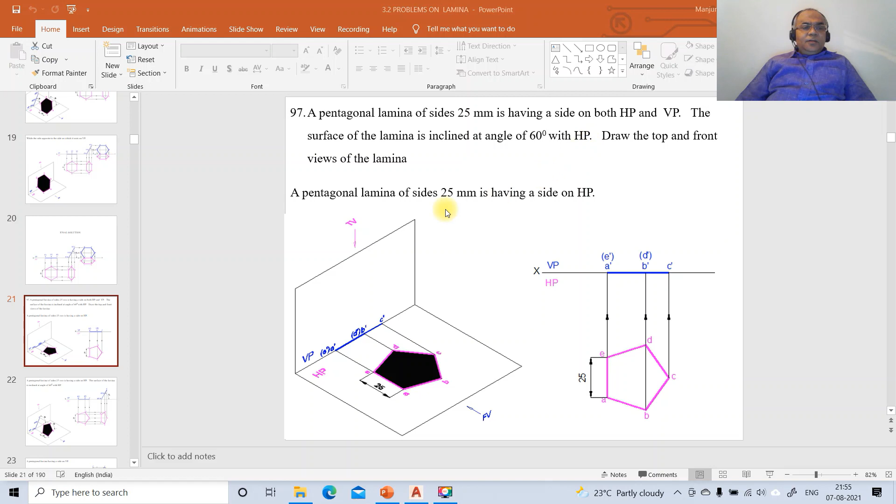A pentagonal lamina of sides 25 mm is having a side on both HP and VP. The surface of the lamina is inclined at an angle of 60 degrees with HP. Draw the top and front views of the lamina.

To do this, first we'll go for this, the actual final solution. So we have to transform this drawing, showing the procedure to do this problem using AutoCAD software.

First we go to the AutoCAD screen, switch off the grid mode and switch on the ortho mode. The command is limits: specify lower left corner, by default 0,0, enter, upper right corner 297,210. This is the sheet size of A4.

Then zoom all. Then go to line, select some arbitrary point on the AutoCAD screen on the lower left corner, click on the first button of the mouse and drag towards the right side for some distance, click again and take the cursor to the top side, take some distance, click again on the first button of the mouse, and press enter key.

Then go to offset, take the distance as 297, select this vertical line and offset to the left side. Again go to offset, take the distance as 210, select this horizontal line and offset to the top side. Then go to zoom extends, then zoom 0.6x.

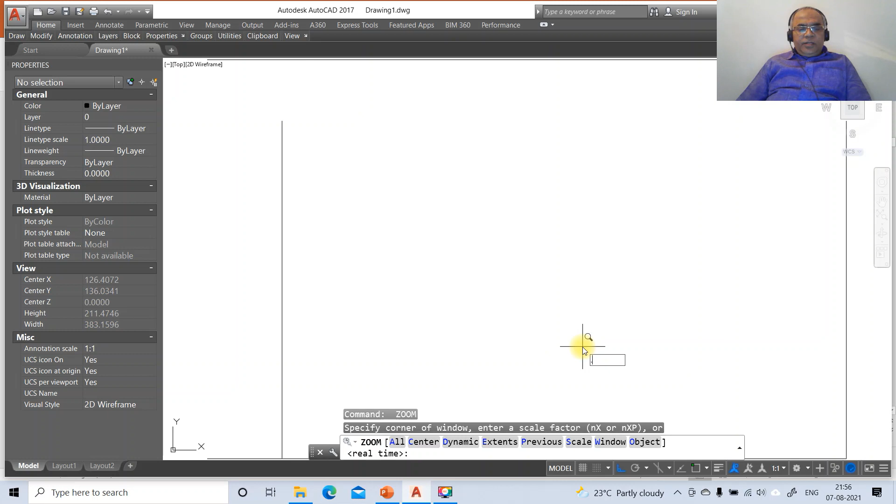Then go to fillet, select this line and this line. Again select between these two and select between these two.

Then we are going to use the layer command. Click on new layer, type the layer name XY, enter. Again click on new, type the layer name front view, enter. Click on new, type the layer name top view. So we're going to get only these 4 layers.

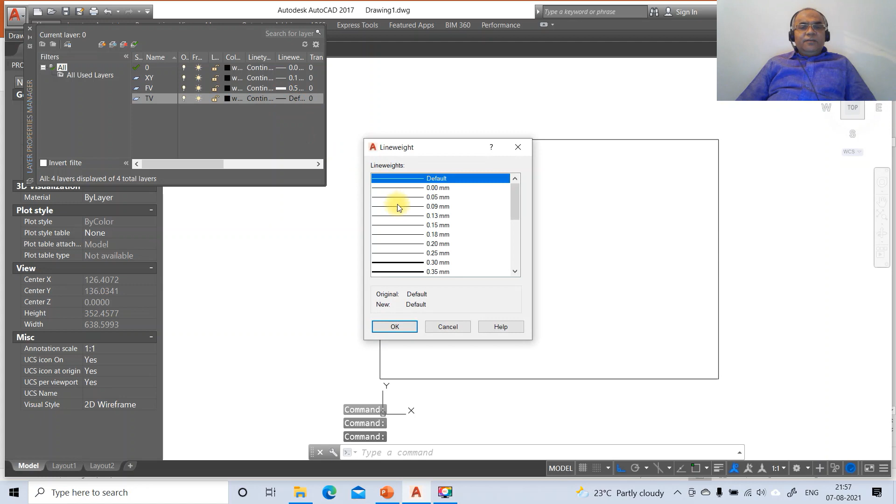Layer 0 will contain the projector lines, and all the projector lines will have line weight 0.05, click OK. The XY line will have line weight 0.13, select that and say OK. The front view will have line weight 0.5, click OK. The top view will also have line weight 0.5, say OK.

Then the top view will be having the magenta color. Just click on that and select magenta color, say OK. And the front view will have the blue color. Click on blue and say OK. Now close the layer command dialog box.

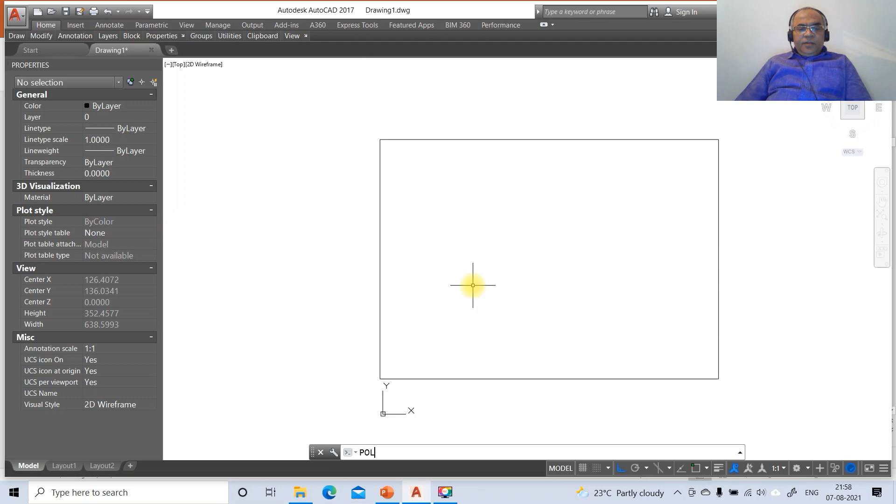Now first we are going to draw the pentagon of 25 mm sides at this position. Go to polygon. By default the number of sides is 4, you just take 5 and select the edge option, select some arbitrary point, click on the first button of the mouse, and drag towards the diagonal side, taking distance as 25.

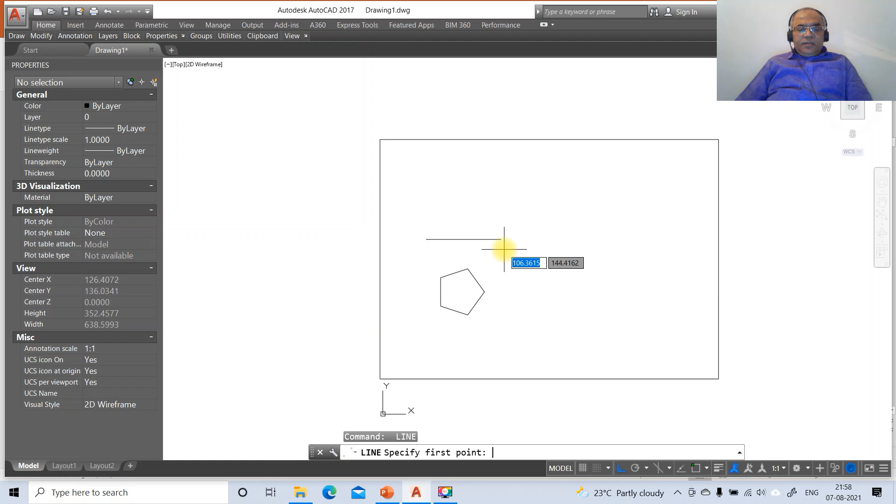Then go to line, draw a horizontal line here of any convenient distance. Then go to line, take the intersection point of this and draw perpendicular to it. Similarly, take the intersection of this and draw perpendicular to it, then go to line, take intersection point of this and draw perpendicular to this.

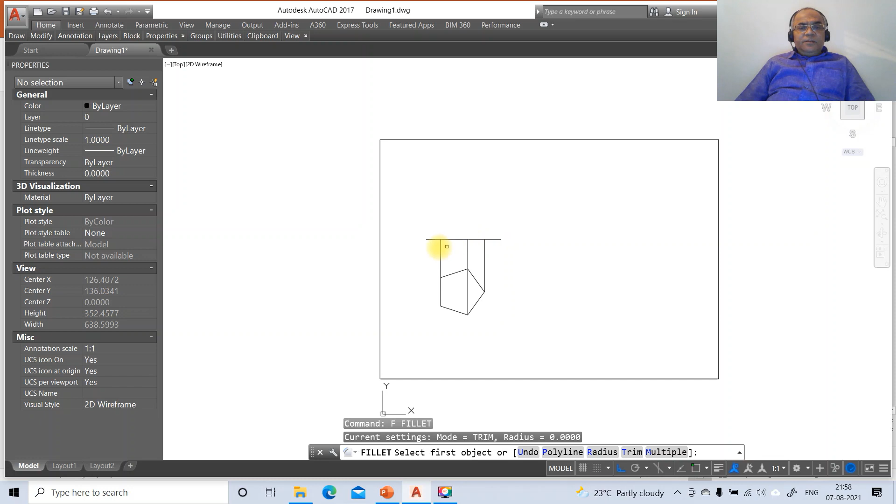Then go to fillet between this line and this line, again between these two lines. Then go to break this line, take the first point as the intersection of this, and say shift at the rate, then enter.

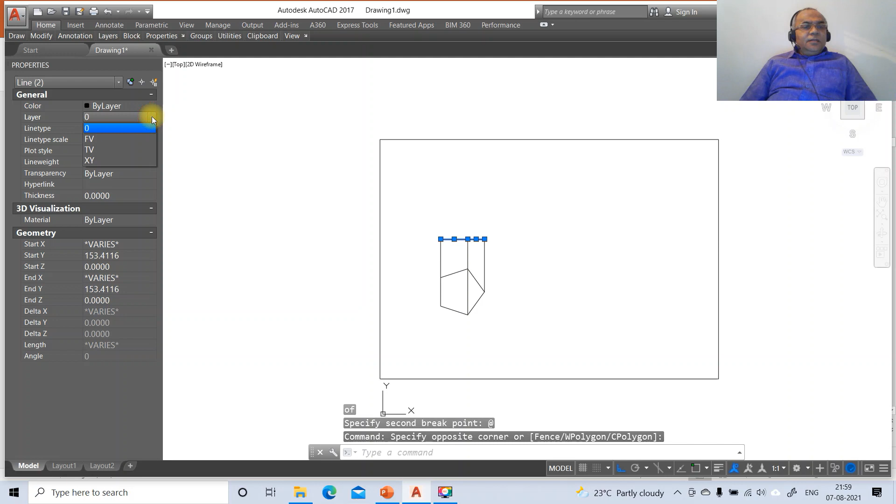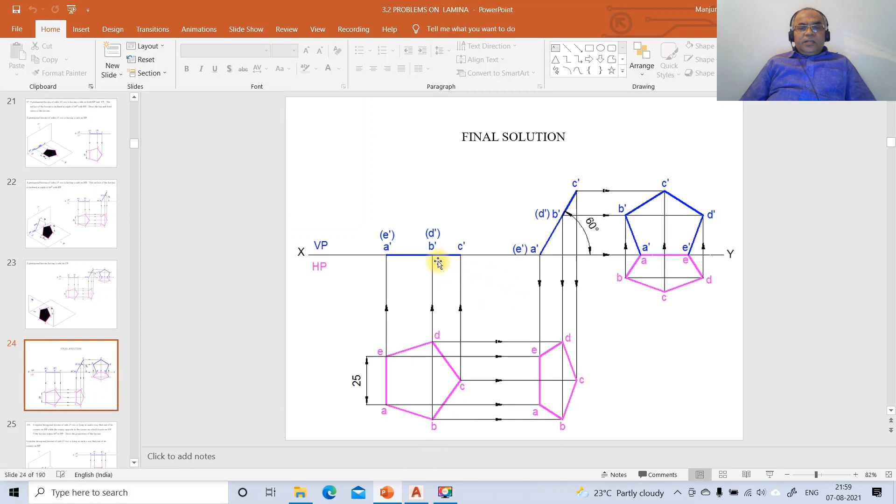Select this entire thing and go to the layer command, change that layer to front view. Similarly escape and click on this line, go to layer, make that layer as top view. Then make the line weight display visible. Then you take this drawing to the second position.

So to do that I will go for the copy command, select objects by selecting this entire thing by window. Take a base point, select some base point and some distance, click the first button of the mouse and then enter. Now once you do that, the angle is at 60 degrees.

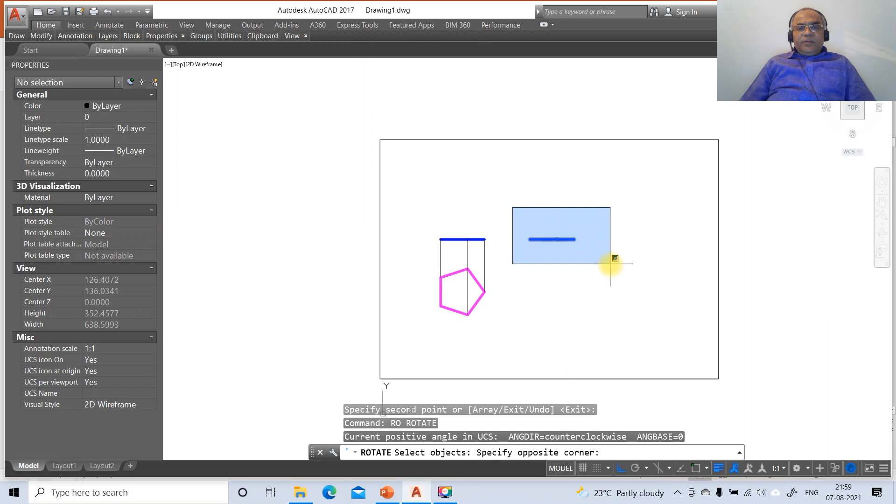So now we need to rotate this. Go to rotate, again select these things by window, specify the base point by taking the end point of this. What is the rotation angle? Rotation angle is 60 degrees in counterclockwise direction. Counterclockwise is positive, so type 60.

Then we need to project from here down. Again project from A and E. Similarly from B dash and D dash, and similarly from C dash.

To do that, go to line, take the endpoint of this, draw a vertical line. Then go to line, take the intersection point of this and draw perpendicular to this line. Similarly line, take intersection point and draw perpendicular to this line. Then go to fillet between this line and this line.

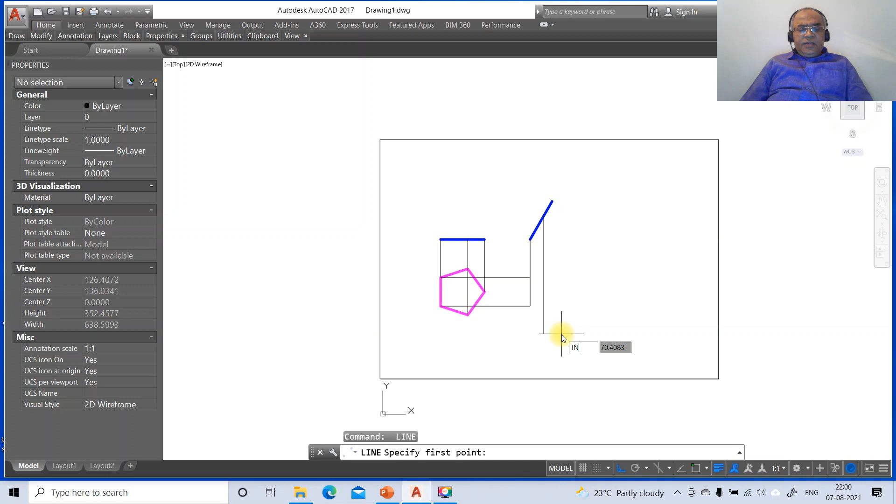Similarly line, take the endpoint, move the cursor from here to the next position on the same line, click on this and draw a vertical line. Then go to line, take intersection point of this and draw perpendicular to this line. Similarly line, take intersection point and draw perpendicular to this line. Then go to fillet between this line and this line.

Similarly line, take the endpoint of this and draw a vertical line. Similarly line, take the intersection point of this and draw perpendicular to this line. Then go to fillet between this line and this.

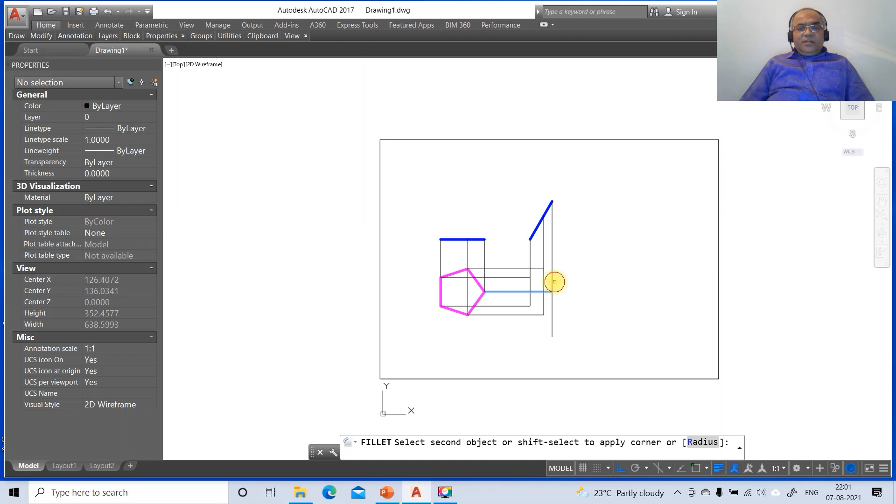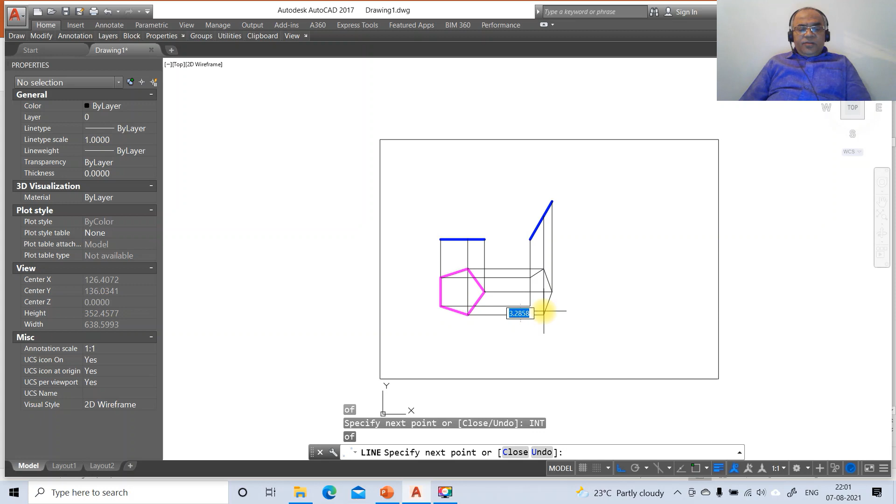Once you do that, now we need to join all these things by a continuous line. To do that, go to line, take the intersection of this, then intersection of this, then intersection of this, then intersection of this.

Once you do that, go to zoom window. Now we need to break this line till here, and also as we want this, you break this line till here and break this line till here.

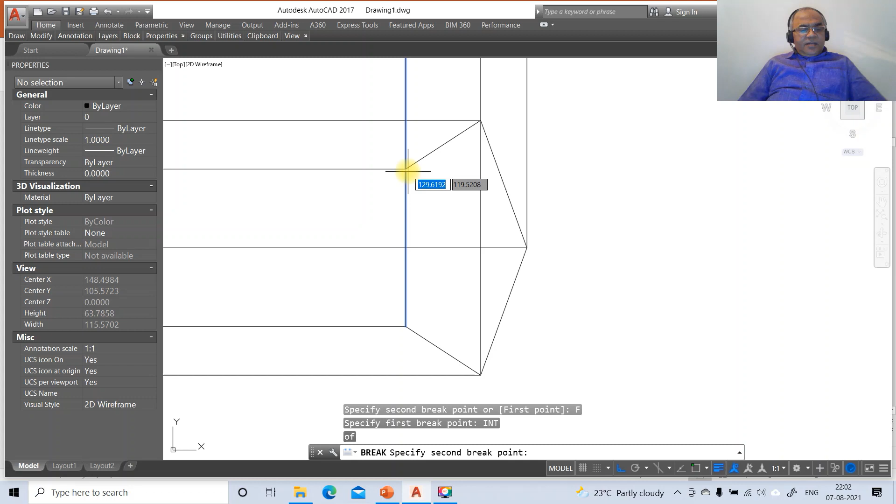To do that, go to break, BR, select this line, take the first point, take the intersection point of this and say at the rate, enter. Similarly break, first point, intersection of this and say at the rate, enter. Similarly break, first point, take intersection of this and say at the rate, and at the rate, enter.

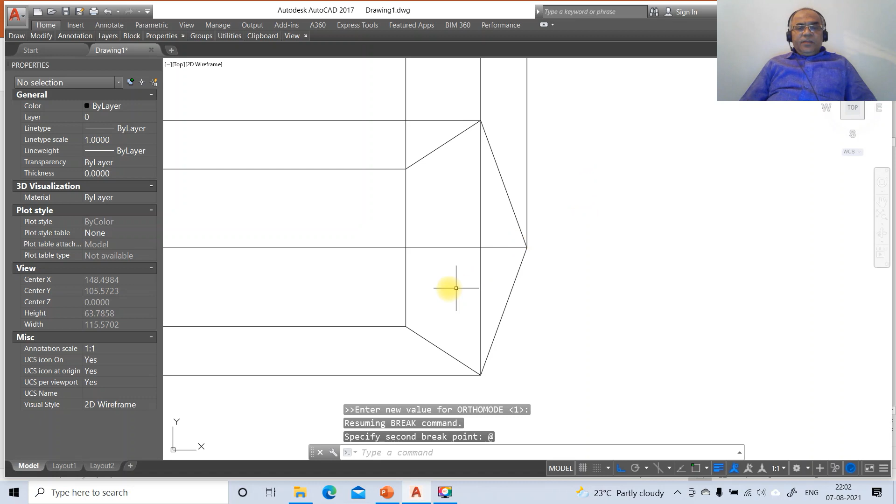Now you select these 5 lines and make this layer as top view.

Then go to zoom previous, then go to line, take the intersection point of this and draw one horizontal line.

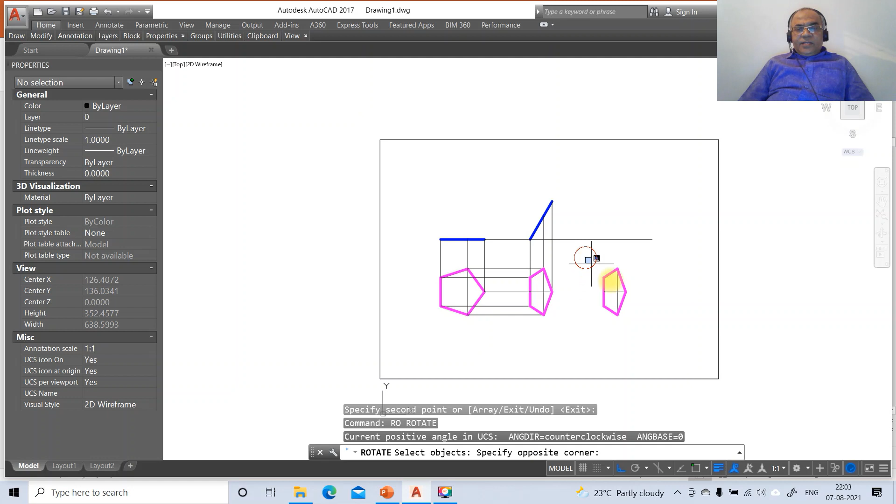Now we need to copy this and rotate in clockwise direction. Go to copy, select this entire thing by window, select this and copy it to the next position. Then go to rotate, select this entire thing, rotate in clockwise direction, because if you rotate in clockwise direction then only this side will become the right side.

So you can see here, you can get it like this, either by rotating or just by moving the mouse, so that you will get this position.

Once you get this, then you move this. Go to move, and since we want to select the entire thing again, type P for previous, select the objects entirely, go to the intersection point of this and draw perpendicular to this. Then again go to move, select objects previous, then move it wherever you want.

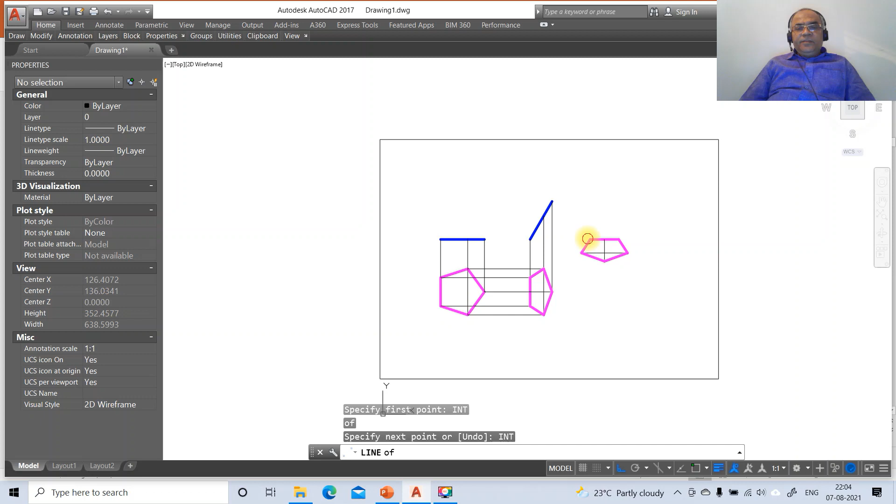Then erase this line, then go to line, take intersection point of this to intersection point of this. Then from here you draw a line on this side. Similarly line, intersection of this, and you draw on this side.

So the side is on both HP and VP, so obviously you are going to get that point directly. Again line, intersection of this and draw perpendicular to this line. Similarly line, intersection point of this and draw perpendicular to this line.

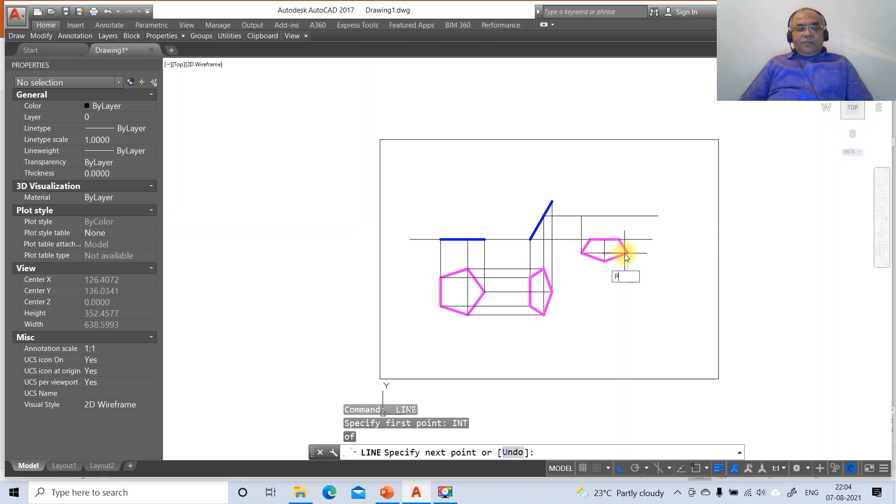Similarly, line into this and draw one horizontal line, and similarly line, extend this line from here to this point. Then go to fillet between this line and also between these two lines.

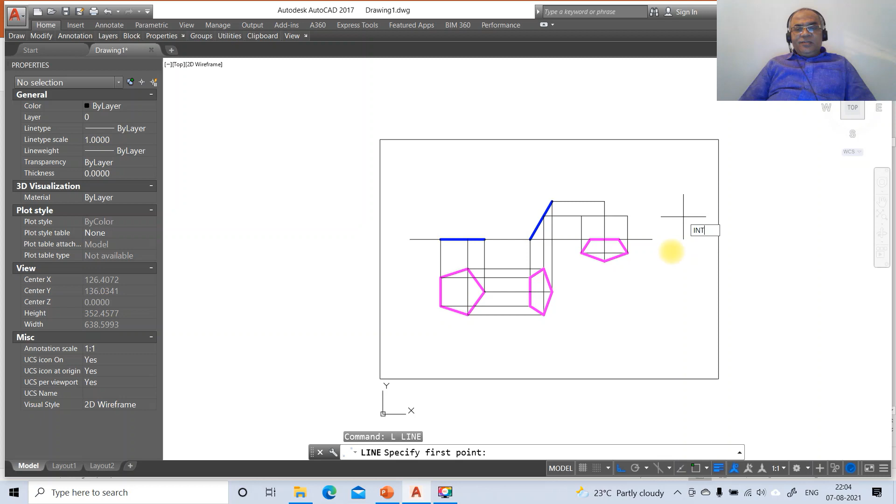Then go to line, take intersection point of this and take intersection of this, take intersection point of this, and take intersection of this. Then select these 5 lines, 4 lines, and make this layer as front view. Once you do that, now the problem is over.

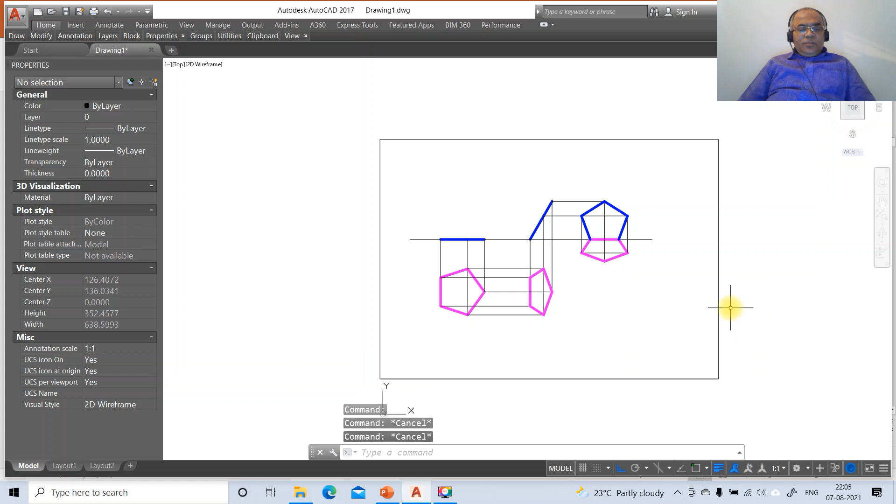Now we need to do all the dimensioning and text. So you just click on this side, and you click on this line and make that layer as XY, and all the other lines will be the projector lines, which will be of 0.05.

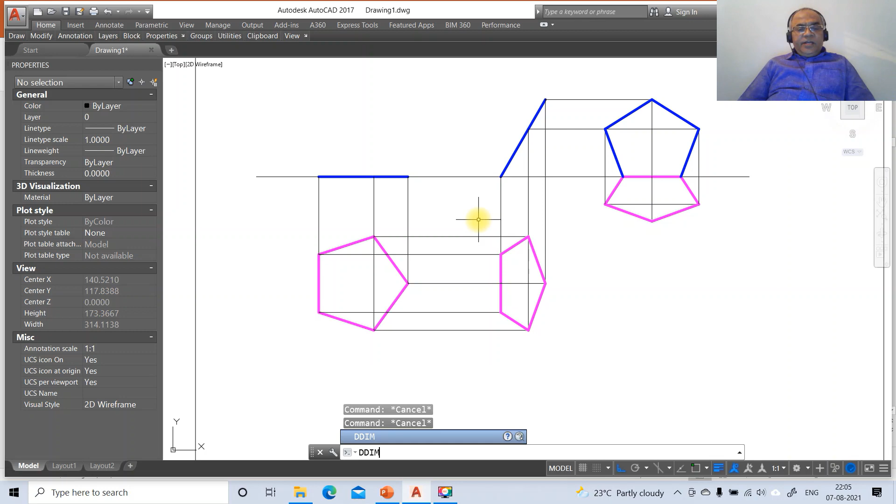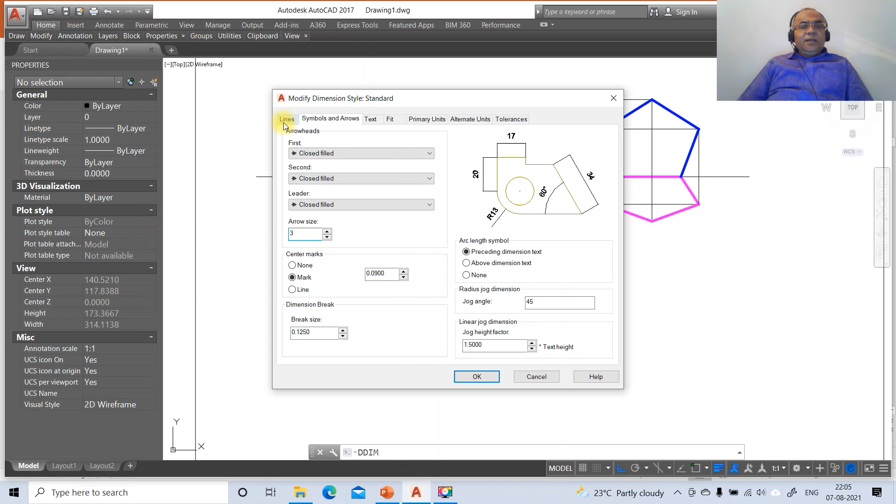Now to do the dimensioning, go to DDIM, then go to modify. So primary units, make the linear dimension as 0, then go to text, take the text height as 3, align with the dimension line, centered, text placement above, then offset from the dimension line as 3, then symbols and arrows, take the arrow size as 3, and go to lines, offset from the origin as 3. Then say OK, and then say close.

Now we go for dim, take intersection point of this, and take intersection of this. So you're going to get 25 mm. Then go to angular, select between these two. So you're going to get it as 60 degrees. So this is how you'll be able to do the dimensioning.

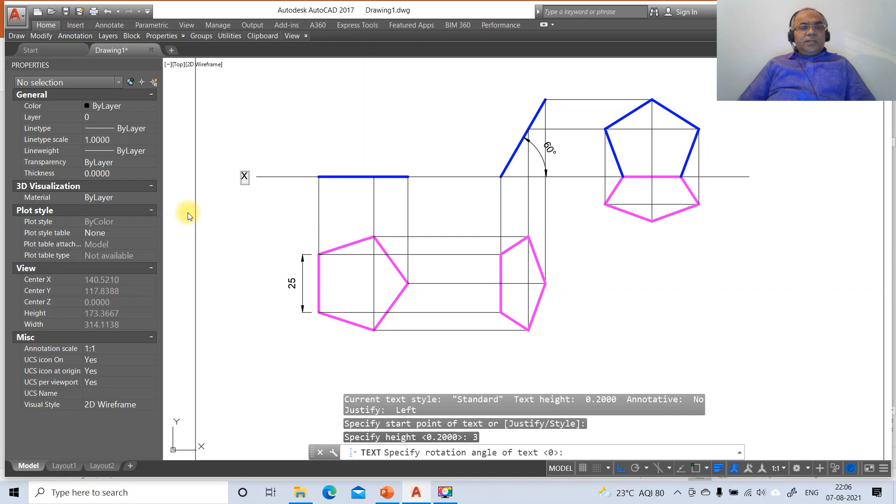Now we need to write the D text. So to write the D text, go to DT, select this point, take the height as 3, rotation angle as 0, and type X, and this is VP, and this is HP, and here this is Y.

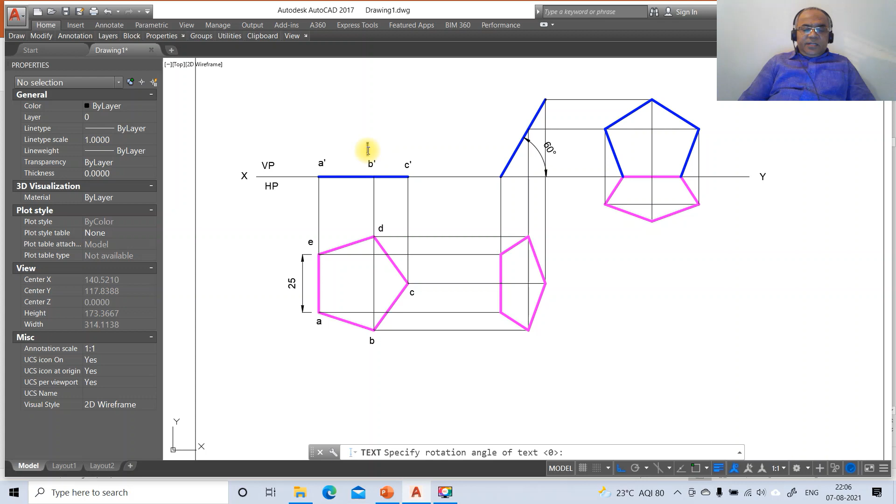Once you do that, now you switch off the caps lock, type A, B, and C, here D, here E, similarly A dash, here it is B dash, here it is C dash, here it is D dash, here it is E dash.

Once you do that, then you just go to move, switch off the ortho mode. So you move X, you move VP, you move HP, and you move A, you move E, you move B, C, and D.

Similarly, you take A dash, take E dash, you take B dash, you take D dash, you take C dash. Then you select this entire thing and then go to layer, make this as front view. Similarly, HP, and take all these 5 A, B, C, D, E. Then go to layer, make that layer as top view.

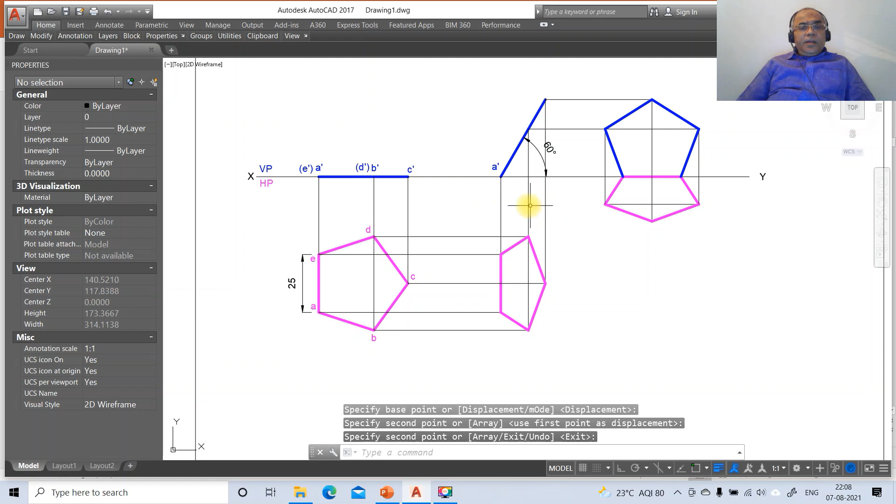So once you do that, now you just copy this here. So take A dash, and you take B dash, and here you take C dash. Then we have D dash, and then you have E dash.

Then you have A, and this A has to be copied here. Then B, and that B will come here, and then C, that C will come here, then D, that D will be here, and it will come here, and similarly E, that E will be here, and you will get here.

So once you do that, then go to D text. So here you mark this as A dash, you mark this as B dash, you mark this as C dash, this as D dash, and this as E dash.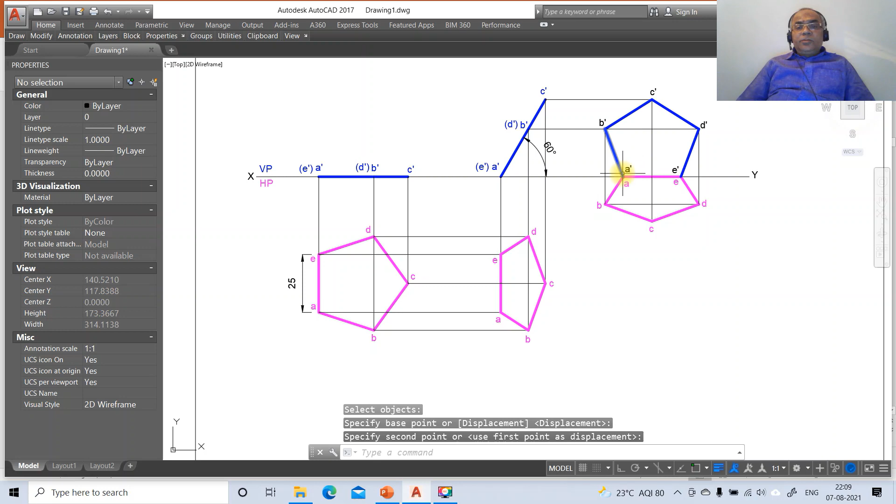Then go to move, this A dash, E dash, move this Y, D dash, C dash, and B dash. So then go to select on this, and mark that layer as front view.

Once you do that, then go to DIMTEDIT, select this and drag this here. So this is how you will be able to get this drawing.

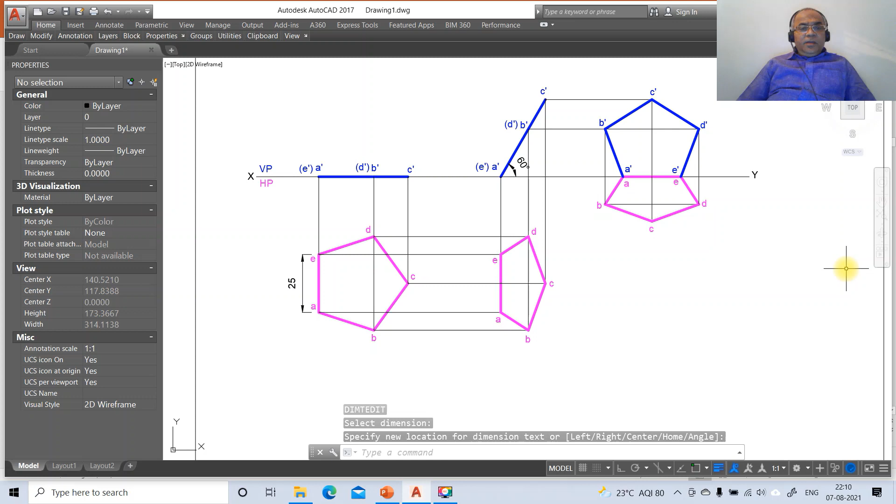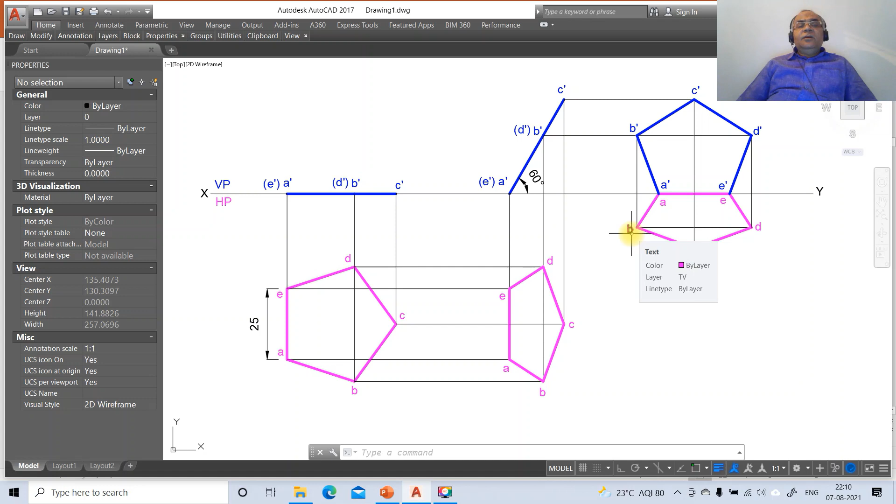And now, for this solution, then go to zoom window, you take this and this are exactly similar, and we need not have to show the projection directions, not required. So this is how you will be able to get the final solution by using AutoCAD software. Thank you.